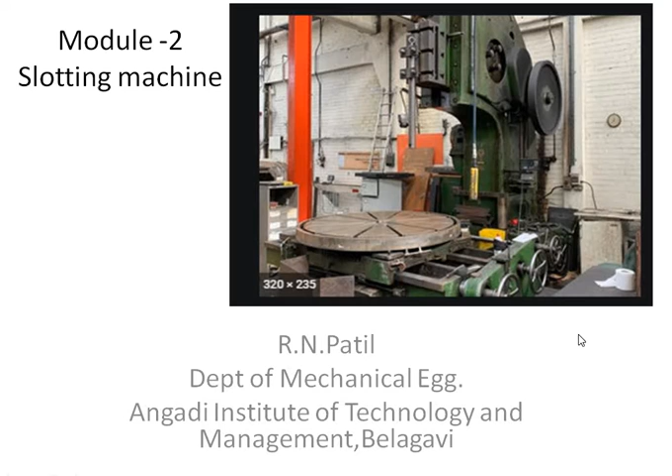What is a slotter? A slotter can simply be considered as a vertical shaper where the single point, straight or formed cutting tool reciprocates vertically, and the workpiece, being mounted on the table, is given slow longitudinal and/or rotary feed. The slotter is used for cutting grooves, keyways, internal and external gears, and slots for various shapes.

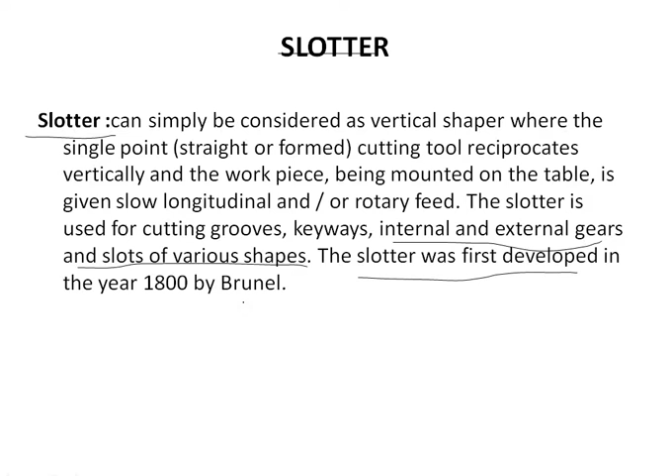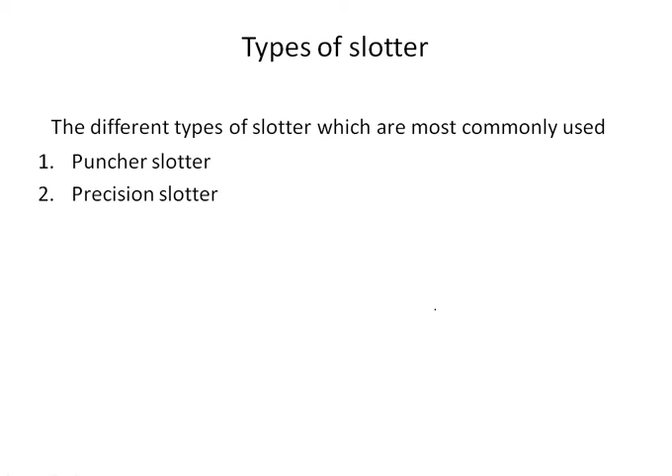The slotter was first developed in the year 1800 by Brunel. The different types of slotters most commonly used nowadays are the puncher slotter and the precision slotter. So what is a puncher slotter?

The puncher slotter is a heavy, rigid machine designed for removal of large amounts of metal from large forgings or castings. The length of a puncher slotter is sufficiently large; it may be as long as 1800 to 2000 mm.

The ram is usually driven by a spiral pinion meshing with rack teeth cut on the underside of the ram. The pinion is driven by a variable speed reversible electric motor, similar to that of a planer. The feed is also controlled by electrical gears.

Next is the precision slotter. It is a lighter machine and is operated at high speeds. The machine is designed to take light cuts, giving accurate finish.

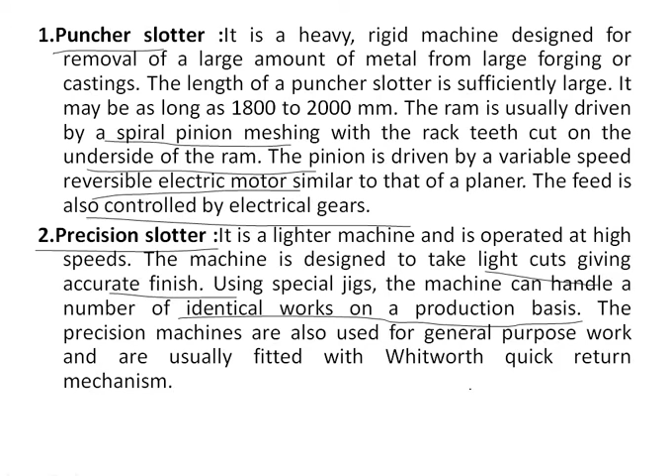Using special jigs, the machine can handle a number of identical works on a production basis. Precision machines are also used for general purpose work and are usually fitted with Whitworth's quick return mechanism.

Next we'll discuss the major parts of the slotter. You can see the base here, which is a very important part on which the whole machine is mounted. The base is rigidly built to take up all cutting forces and the entire loading of the machine.

The top of the bed is accurately finished to provide guideways on which the saddle is mounted. These guideways are perpendicular to the column face.

Next comes the column, which is in a vertical position. It is a vertical member cast integral with the base and houses the driving mechanism of the ram and the feeding mechanism. The front vertical face of the column is accurately finished to provide ways on which the ram reciprocates.

Next, coming to the saddle, you can see this is situated or mounted above the base, exactly in front of the column. It is mounted upon the guideways and may be moved toward or away from the column either by power or manual control, to supply the longitudinal feed to the workpiece.

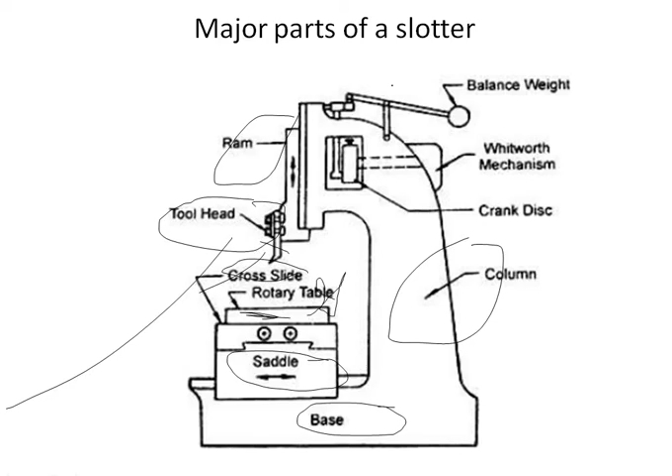Next comes the slotter operations. Slotter is mostly used for machining internal surfaces. First one, internal flat surfaces.

Second one, enlargement. In figure A, you can see enlargement or finishing of non-circular holes bounded by a number of flat surfaces, as shown in figure A.

In figure B, you all can see blind geometrical holes, like hexagonal sockets, as shown in the figure.

Also internal grooves and slots of rectangular or curved sections, as shown here. In figure C, you can see internal keyways and splines, straight tooth of internal spur gears, internal curved surfaces, and internal oil grooves, which are not possible in a shaper. This is possible in slotters.

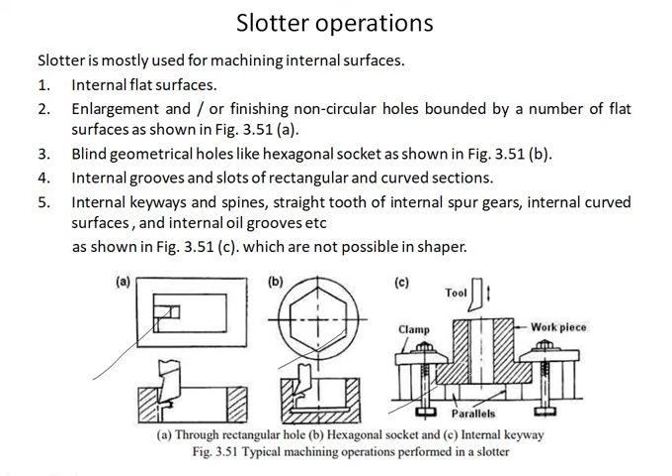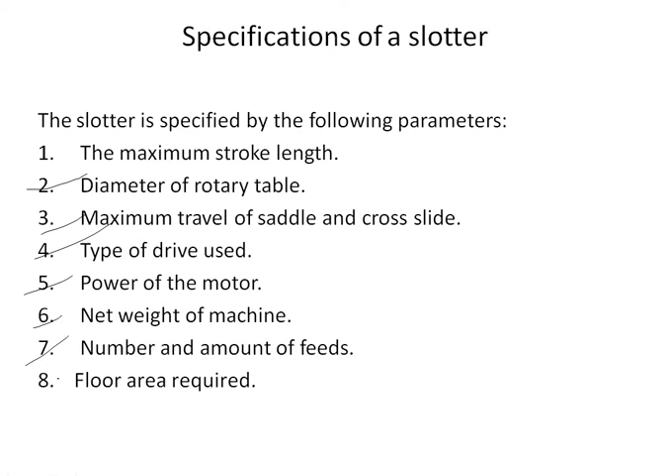Next, specification of slotter. A slotter is specified by the following parameters: the diameter, maximum stroke length, diameter of the rotary table, maximum travel of saddle and cross slide, type of drive used, power of the motor, net weight of the machine, number and amount of feeds, and floor area required.

Next comes drilling. So what is drilling? Drilling is the process of originating holes in the workpiece by using a rotating cutter called a drill. The machine used for this purpose is called a drilling machine. Although it was primarily designed to originate a hole, it can perform a number of similar operations.

In a drilling machine, holes may be drilled quickly and at low cost. As the machine tool exerts vertical pressure to originate a hole, it is also called a drill press.

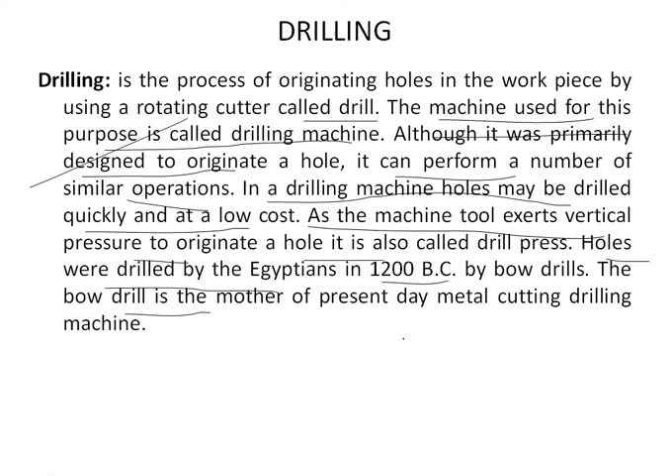Holes were drilled by Egyptians in 1200 BC using bow drills. The bow drill is the mother of the present-day metal cutting drilling machine.

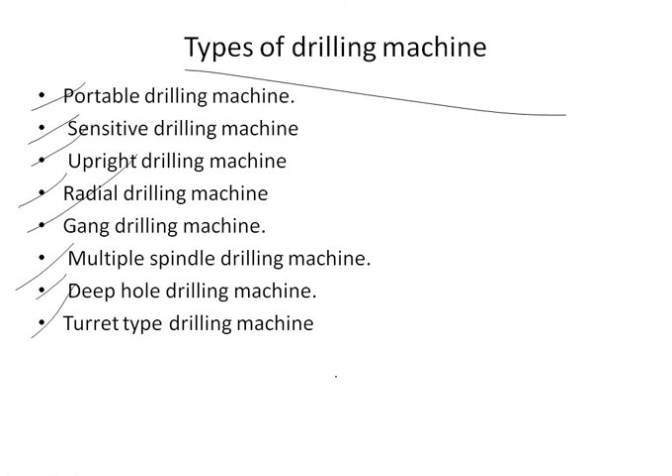Next, types of drilling machine: first, portable drilling machine; second, sensitive drilling machine; third, upright drilling machine; fourth, radial drilling machine; fifth, gang drilling machine; sixth, multiple spindle drilling machine; seventh, deep hole drilling machine; and eighth, turret type drilling machine.

Unlike the mounted stationary drilling machines, the hand drill is a portable drilling device which is held in hand and used at locations where holes have to be drilled. The small and reasonably light hand drilling machines are run by a high-speed electric motor. In fire hazard areas, the hand drilling machine is often rotated by compressed air.

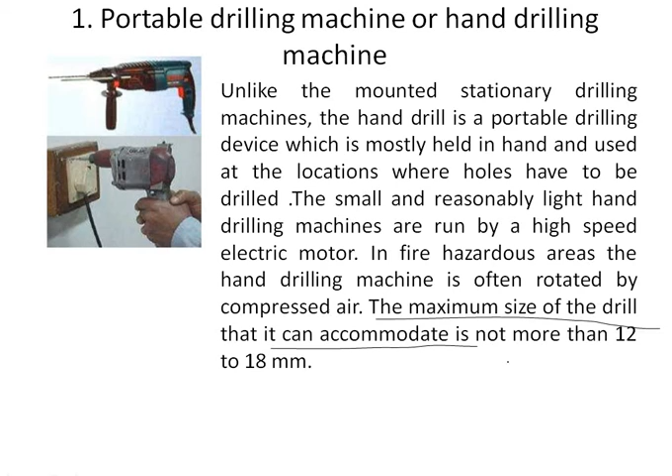A head supporting the motor and driving mechanism, and vertical spindle for driving and rotating the drill. There is no arrangement of automatic feed of drill spindle. Drill is fed into work by hand control. High speed is necessary for drilling small holes. Sensitive drilling machines are capable of rotating drills of diameter from 1.5 to 15.5 mm.

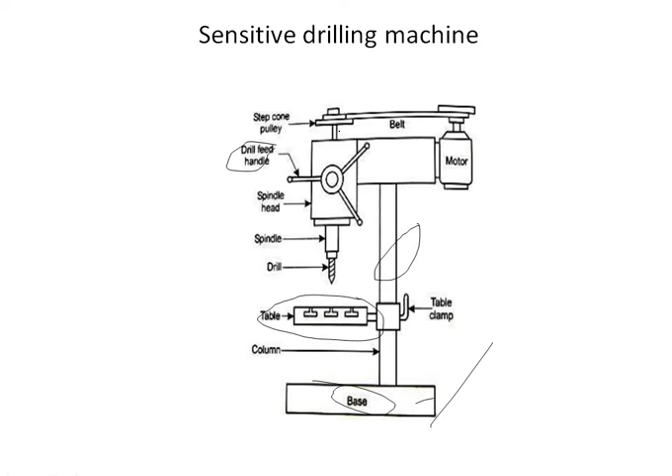Next comes upright pillar or round column section upright drilling machine. This is usually called pillar drilling machine. It is quite similar to sensitive drilling machine, but a little larger and has high capacity compared to sensitive drilling machine, that is from 0.55 to 1.1 kilowatt, and they are mounted on the floor. Drill feed and work table movements are done manually.

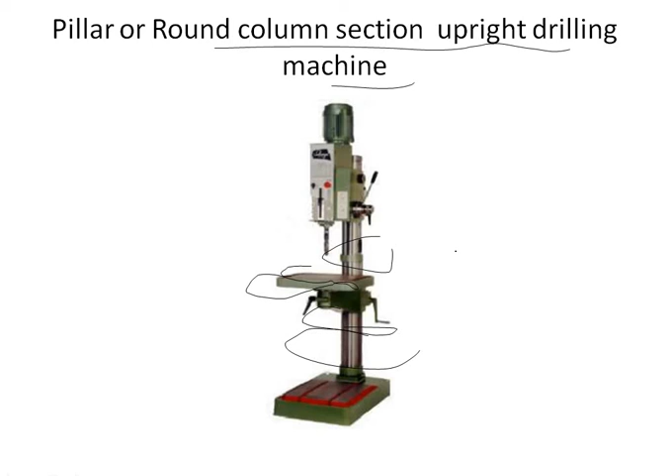This is a low cost drilling machine and has a base, a tall tubular column, an arm supporting the table, and a drill head assembly. You all can see this tall tubular column and this table. Arm may be moved up and down on the column and also be moved in an arc up to 180 degrees about this column. Table may be rotated 360 degrees about its own center independent of position of arm. Maximum size of the holes that can be drilled is not more than 50 mm.